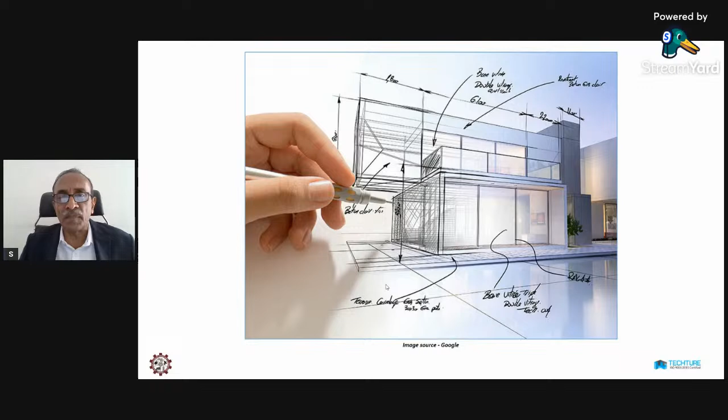So we'll quickly jump to case study one. This is a project we have done in West Africa - West African Soya Industries Limited in Nigeria. The scope of this project was a solvent extraction plant, a plant where you extract oil out of seeds. The seeds could be soybean, rice bran, sunflower, or groundnut. Basically, this is a complete plant where our scope was to analyze and design the complete MS structure, and also do the foundation design.

We were given the general arrangement drawings by the supplier, and the client connected us to the machine suppliers. We were given the load data, and for that we made STAAD models. I'll take you through the complete process where the shop drawings were generated. The best part is that we were able to execute this project sitting in India, Nagpur, several thousand kilometers away. They followed our drawings in toto, and the plant was erected.

The other building that we were assigned was a de-oiled cake building. It's a godown, a warehouse, nothing big in this particular building, because we were supposed to do the foundation design. The vendor was Kirby Systems - Kirby is an international giant in pre-engineered buildings. So we got the drawings and were assigned to check, as a proof check, their drawings for correctness. Mostly they have a very good team themselves, so there are very few errors, so to say.

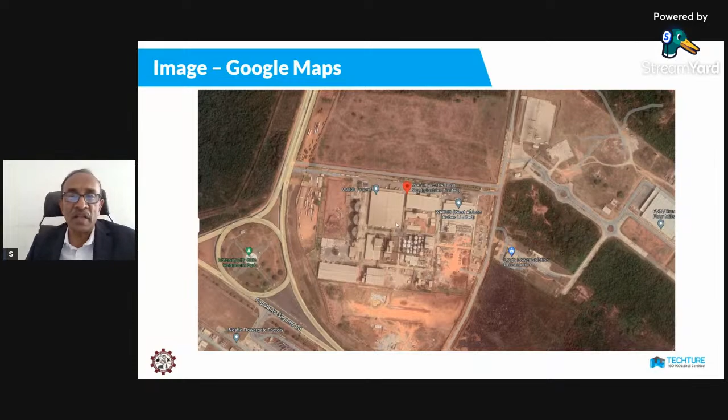So moving on first, this is the image of the location of the plant in Nigeria. It's about 40-45 kilometers from Lagos, which is the commercial capital, so to say, of Nigeria. So this is the Google map.

So it happens in two phases. One is the civil foundation executed on the site, and the structure is fabricated either in the workshop or in India at many locations - sometimes they do it themselves at the site itself. But there are certain challenges in getting it designed and executed on the site, because there are issues of inconsistent current or power supply available, and there are some quality issues also.

So generally, for such important plants, the plant should be fabricated in a workshop, and then it is painted - there's a process called shot blasting and sand blasting. Then there's a process where they put enamel paints or epoxy paints on all the components, and they are so designed that they are just like Lego toys. Most of you are conversant with Lego toys - it's all plug and play. You should have everything nut bolted, and then you send it, and they should perfectly fit each other, and that is how the erection process starts.

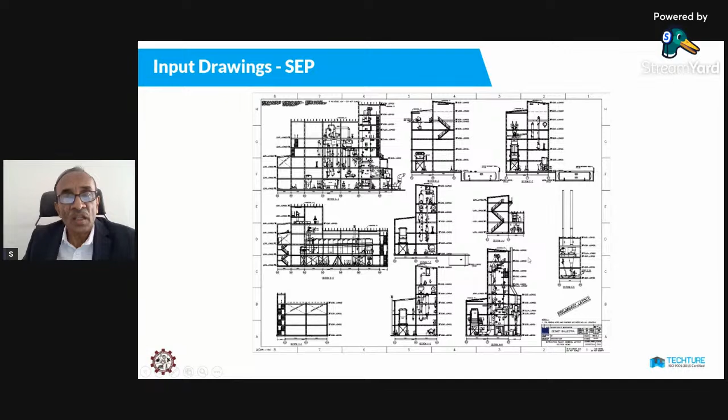So the first step is to prepare a three-dimensional model. Here we had used the loading as per the European code, so we had used the British standards BS 6399, and for the earthquake, we were told we could follow the Indian standard. The grade of concrete used is M30, and the grade of steel is FE 500.

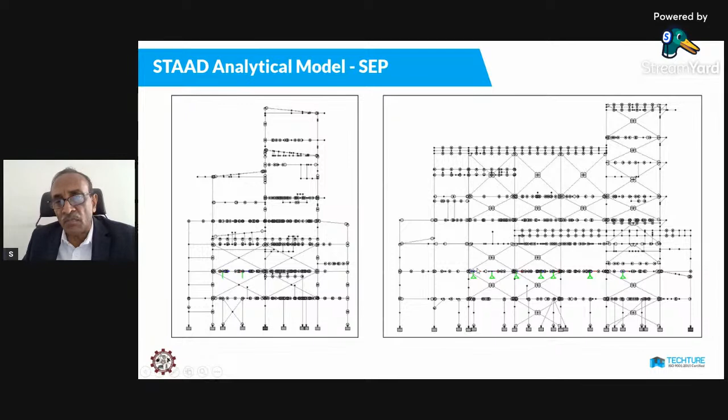So this is the place where this model can be shared with the client. It can be shared with the supplier, who would zoom in and see whether the beam framing suits him or not. There are a number of cutouts required for the process as per the drawing. So whether the input given by the supplier has been translated into your STAAD model or not, this is the place where you can check it first.

There are some monorails to be attached. Here I can show, if you can see my cursor, there's a monorail for lifting equipment. So there's a path of the monorail which is given in the input drawing, and that also you have to model here.

And the first iteration, let me tell you, is you have to guess some of the column members and beam members, and then run the STAAD and achieve a convergence.

Now, any good structural engineer would want to optimize on the structural beams, but at the same time you should remember that there should not be too many sections, because then fabrication becomes very difficult. If you get too many members, then the cutting length or the wastages are quite large, and that defeats the entire purpose of economy. So this is the analytical model where the properties have been assigned.

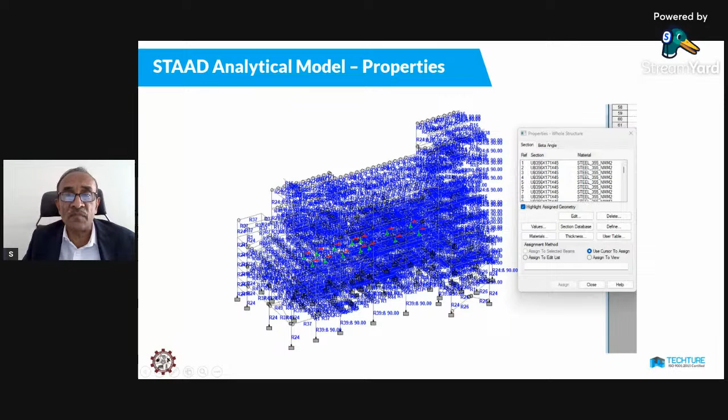Similarly, you have the live load, the earthquake load, the dead load, all the loads and the load combinations, whatever is expected, has been given here. All loads have to be considered.

Now this is the place where once again you can interact with the client, or the machine supplier, and tell them these are the loads that you have been considering, and if they find that some additional load is to be put on the structure, this is the time it can be done. Once you get confirmation from the client and the machine supplier that the model looks good, then you can proceed with this analysis.

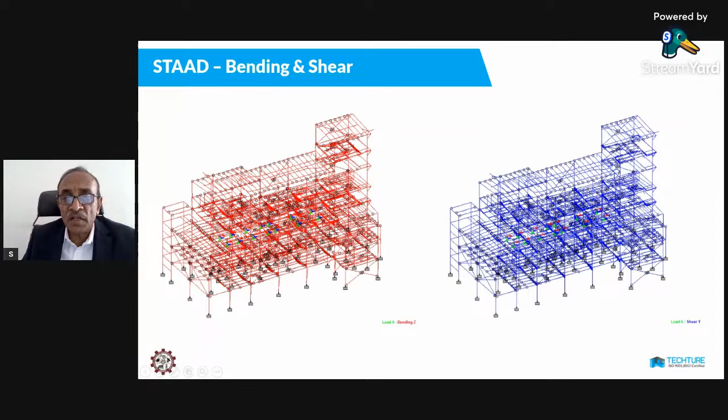Here you are getting the bending moment diagram and the shear force diagram, and one more is the deflection diagram. So deflections are the most governing, because the deflections are the first to occur. If the deflections are under control, then the structure gets an opportunity to stress itself.

If your deflections go out of control, then the stresses do not reach their peak values, neither in bending nor in shear. And usually for steel structures, the structure will have a tendency to distort. See here, you can see some of the nodes flying off, they're going away.

But if this lateral deflection is within limit, then the structure is said to be rigid — it is properly tied up. And from that point, you can get the bending moment and shear forces.

So now each and every member has to be checked for the maximum allowable bending stress and maximum allowable shear stress. That is how a good structural engineer has to tabulate the sections required at different levels, assign them, reanalyze it, and this iterative process has to be done over and over again till he gets a good structure.

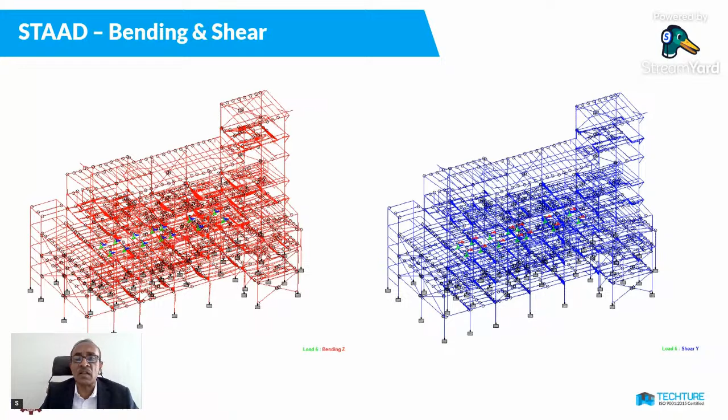Now we come to the foundation design calculations. Once you have analyzed the structure, you will get the reactions at various points at the foundation level. Now you have to club all the columns into different categories, and for a particular category you can choose the maximum axial force, the shear, the biaxial bending, and torsional moment also.

There are 6 degrees of freedom in any rigid structure — I hope everybody knows that. You have 1 axial force, 2 shears, 2 bending moments, and 1 torsional. So in total, you have 6 degrees of freedom. Any rigidly connected frame structure will have 6 degrees of freedom, so you can expect 6 reactions.

Using those 6 reactions, at times the torsional moment does not govern, so we tend to neglect that and ignore it, focusing on the axial force, which is predominant, and the biaxial moments. Shear is usually under control if axial force and bending moment are taken care of.

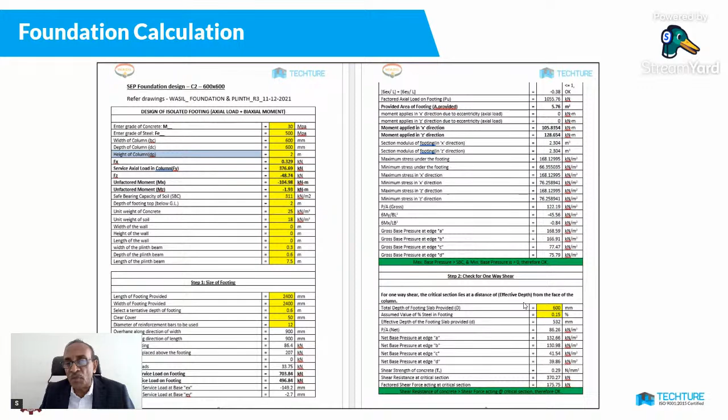Then you have to also check for the one-way shear depending on the cantilever portion that is outstanding beyond the column face. So let me not spend much time on this.

Next we come to the Tekla model. Now what is Tekla? Tekla is a tool which will help a structural engineer model all the sections through software. It's a software where you can design all the connections, and it will generate all the shop drawings. So Tekla is one company supplying software for shop drawings.

The other is Advance Steel, owned by Autodesk. So either you use Tekla or Advance Steel, and you can generate the model.

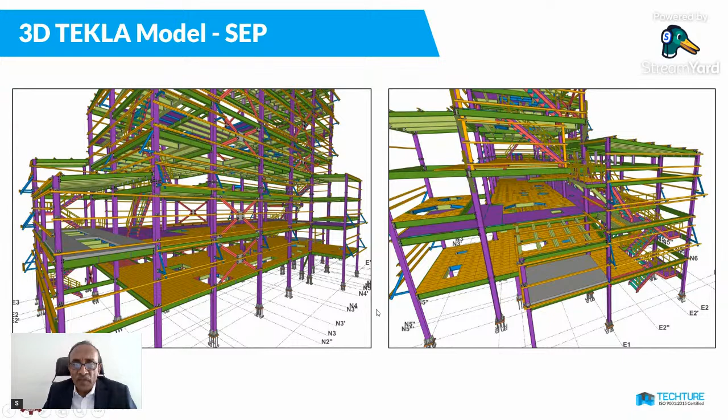The beauty here is this model is directly input from the STAAD output — the output of STAAD comes directly into Tekla. So these are some views of Tekla, where you can see we have modeled the columns, the beams, and the connections.

Now this is a closer view of the connectors. All these bolts, depending on the shear force in the beam, transfer the shear to the column through the bolts — you have 4 bolts on this side, 4 on the other. You have to calculate the thickness of the plate, and the weld of the cleat through which it is transferred.

So all these calculations are to be done by the structural engineer. There are some stiffeners to be provided so that the seat, this is called the seat, should effectively be able to transfer the load from the beam to the column.

The beam itself is designed. The section of the beam is designed for the bending moment in that beam and the shear force coming in that member.

And if you see the arrow here, this is for the one-way slab. Now the slab can be either a precast slab, it could be a metal deck sheet on which concrete is poured, it could be grating, steel grating, it could be checkered plates, and so on and so forth.

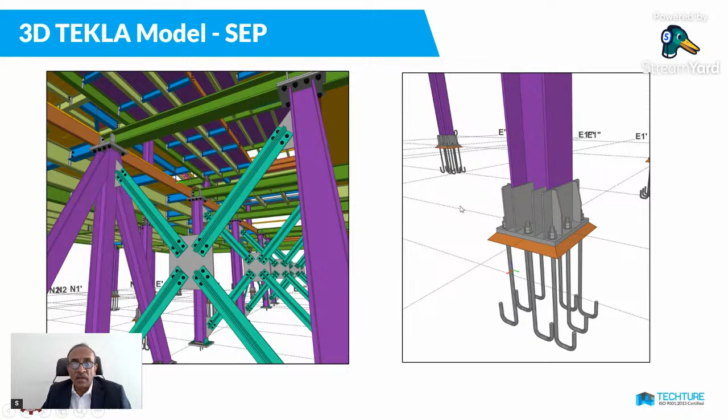Now this is very important because this is the first drawing issued by our office to the client to procure the steel. So what he does is he takes this drawing, does his own study, and then transfers this drawing to the fabricator. The fabricator himself will study all the details, and then he will place the order, and that is the first step to start the fabrication.

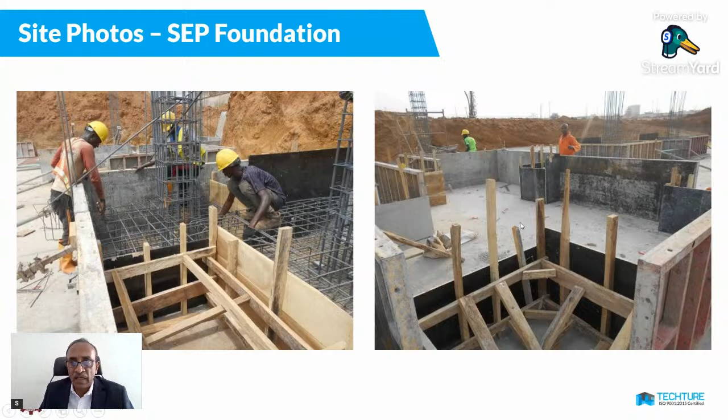Now this type of technology is available using building information modeling, BIM as it is popularly called, where you first develop the model in your office, share it with the client, and then as the process of erection goes on, you can compare the model and see how it complements the planning and the practice.

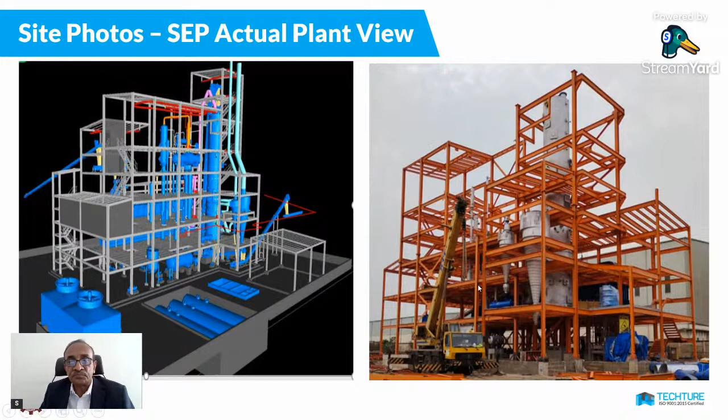So these are some of the images of the equipment at different levels that they are placed. We were given the load data, about 30 metric ton, 50 metric ton to be kept hanging from the floor. So 50 metric ton is a huge load.

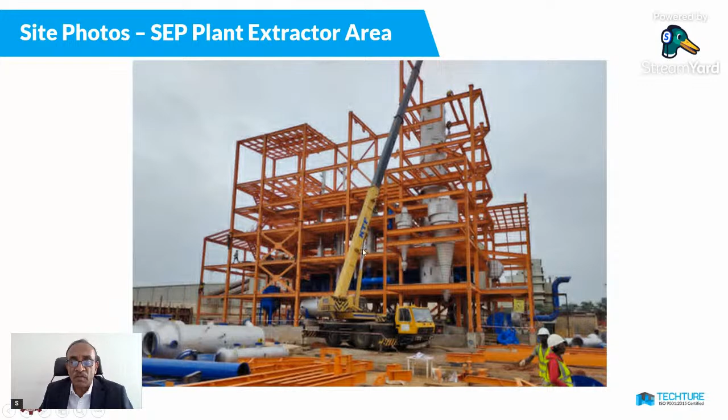So we had to accordingly design the various fixing arrangements, how the load will be first transferred on the cleat, from the cleat onto the members, from the members to the secondary members to the primary members, and from the primary members to the column, and through the column to the foundation. So this is basically the chronology of the load transfer mechanism in any structure.

So these are some of the views. The blue one which you see is the main heart of the plant, that is called the extractor. We were required to give all the detailing of the steps.

Each step has to be accurately designed. It has to be actually detailed out in the Tekla model, and all the connections, because the plant is about 40 to 50 kilometers away from the workshop.

So any change means it's a cost to the client. Suppose I miss out on one member here, or if the length is missed out, then it's a cost to my client, and also a huge time delay, because when the people at the site try to assemble this member, if they find it either too short or too long, then the work will be held up for some time, and the supplier has to be informed. Then he will manufacture that.

He may have some other ongoing projects, so he may ask for 7 days time. Then that particular piece will arrive. It has to be painted, shot blasted first, then painted, and brought here. Then it has to be measured and fitted again. So the complete cycle is about 15 to 20 days. You have to be very particular in this case, for any pre-engineered building for that matter.

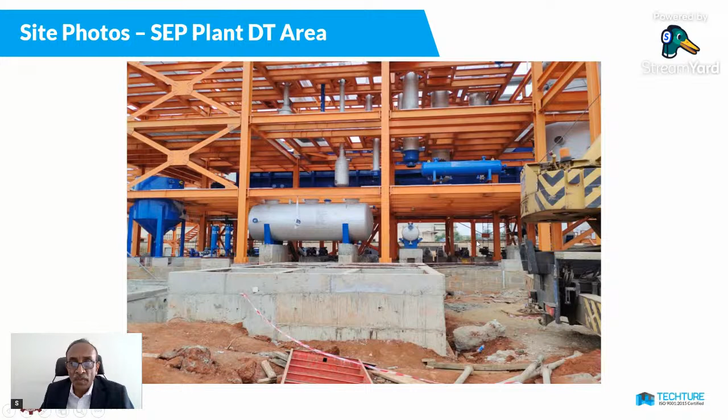So these are some more views, and this is a closer view of the various equipment. These are actual pictures inside the plant. It's quite complex because the bracing systems have to be planned in such a way that you require the rigidity

for the plant. At the same time, you don't obstruct the movement of the personnel, because if the process people who are going to operate the plant find it difficult, then it becomes very difficult.

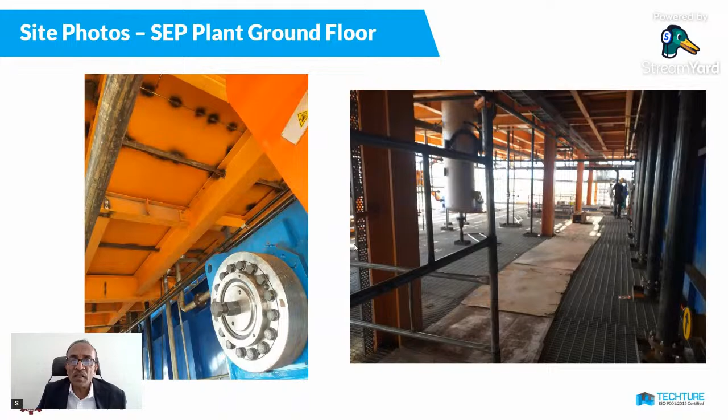So now I'll quickly run through some of the images, some internal views. After about 7 to 8 months after delivering the project, at the last stage in November, I happened to visit the plant. They invited me, and it was a very hectic journey to Africa. But since it was the closure stage and only part of the sheeting was remaining, I was informed that now, in February, the plant has already been commissioned and it's running well.

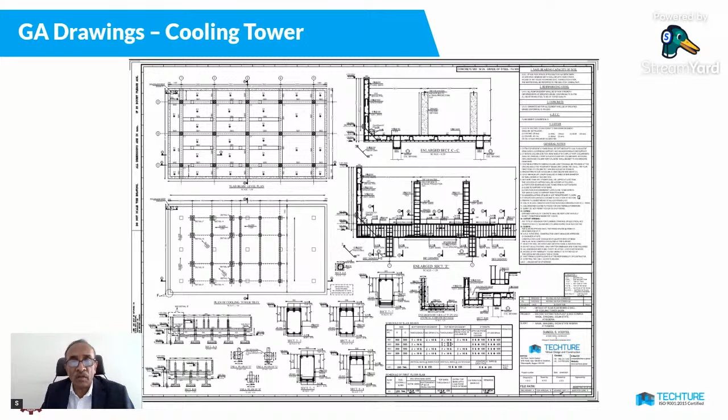So that is mounted. All the details are very important pertaining to levels, because we cannot communicate with the site since the site is quite far away, and we have some timing issues also. They are lagging behind us by 4.5 hours. So for example, now it is 10:30, quarter to 11, so it must be 6 o'clock there. It becomes very difficult for them to catch up with our time, or for us to catch up with theirs. So this is the civil of the cooling tower.

These are some tanks, underground tanks called the hexane tanks. These are the details pertaining to hexane tanks. You have to design the wall here, the reinforcement. I'll not go into much detail, but these are the details of the bar - bar A, bar B, and so on. Then if you want to have a haunch here for better strength at the junction of the wall and the base raft, that detail also has to be given.

Then you have to give the details of the bolts. For a person to get down into the pit, you have to give some rungs like you have in a well, so the person can climb. If you miss this out, you have to resort to Hilti or some other company, which adds to the cost. This is the detail of the solvent water trap, where you have to make different compartments, all RCC, but everything has to be properly detailed. There's a hold fast here, and how to connect one particular edge angle has to be given.

Then all these details have to be worked out. For this, you either need the complete detailing from the supplier, or you have to raise questions. This comes with experience, of course, but you have to be very alert on this point, so that you don't miss out anything and things are executed properly.

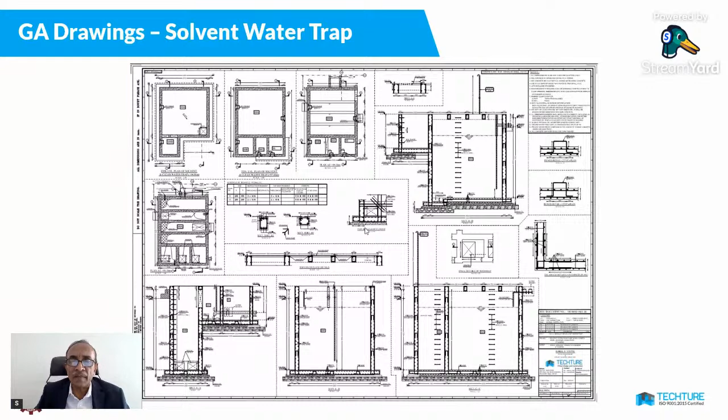So now this is the second general arrangement drawing that we have, the civil drawing which we issued for the de-oiled cake go-down. As I said, Kirby was the supplier here. Kirby gave us the reactions at different levels at the foundation top, and based on that we generated the drawings. This is related to the plinth.

Now here two twin beams had to be given because there was excess fill. The flooring height was about 1.5 meters or even more, because the ground was low lying. So what we do is give a first main beam, then put the masonry brickwork, and then run a smaller beam so as to sustain the pressure. This is a cost saving measure.

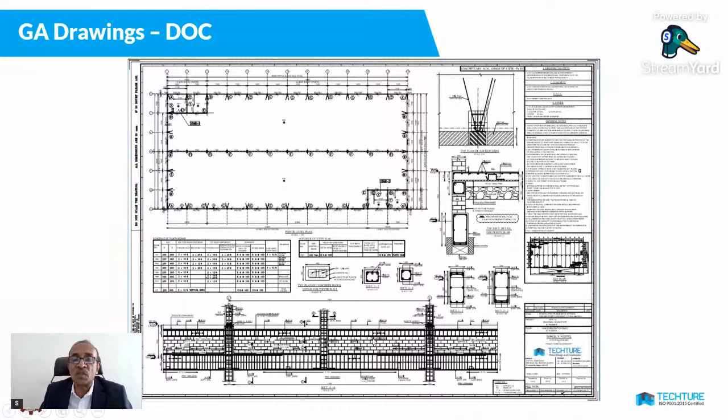Otherwise, you can take a retaining wall from here, which becomes expensive, and also takes a little more time. This is another engineering store building that we had done. All the drawings we have generated ourselves.

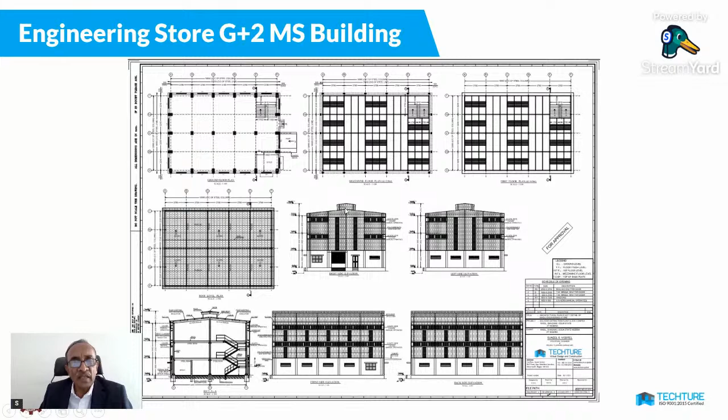This drawing is to be sent to Kirby or other vendors for their quote, so we have to be very clear. This is based on the input we received from the client, that we want the size of the building to be something like 20 by 30, and it will be 2-storied or 3-storied, 3 levels. There will be a staircase on this end, and an office on this floor, and things like that. So these are some images of the building.

So with this, I come to the end of the first case study.

Mr. Azaz, I think we should go ahead with the case studies and then come back to question answers. Is that okay? Hello? Hello? Am I audible? Yeah. Can I move to case study 2, Mr. Azaz? Yes, yes, sir, you can. Yeah.

Okay, so case study 2 is a project in Chandrapur. It's a pharma-based project, multi-organics. This is why I have chosen this, you'll come to know very quickly when you see the plant. This was the input that we got, that they wanted a warehouse of 60 meters by 60 meters, column-free space as much as possible, and this was the input drawing.

They said that we want to have the various things planned. You have some raw material and some space for this and that. So this was the basic input from the client. Then here you can see a sketch where they wanted some monorail on the cantilever overhanging portion, and whether they want to lift and place some of the jumbo bags onto the trucks for loading, and so on and so forth. So this was their first input.

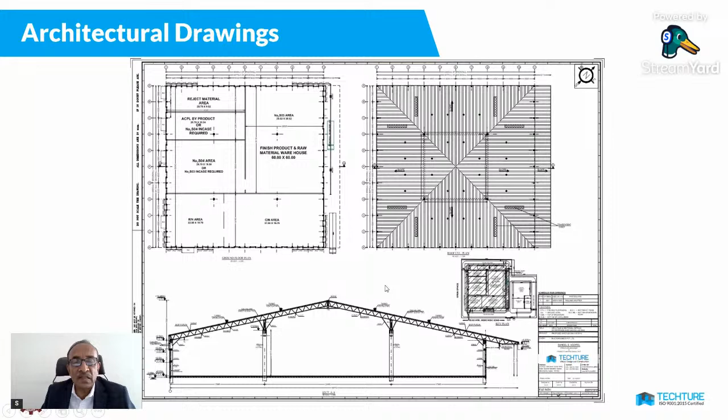So with that, we started, and these are the first architectural drawings which we generated, just to showcase the system that we propose to give. These are the views we generated to show what is in our mind. The hatch shows the brickwork. Above the brickwork there will be sheeting, and then there will be a pyramid.

And then we showed the foundation plan, we detailed out the foundation plan. We showed them that there will be only 5 columns. Then for the proposal, they asked us for the estimate. We prepared the estimate and gave them the costing.

Once they compared that with similar quotes they had got from a pre-engineered building, they were quite happy. They said, okay, it looks like you will be able to match our expectations and our requirement, because there are only few columns. We said, yes, we'll definitely try to match your expectation.

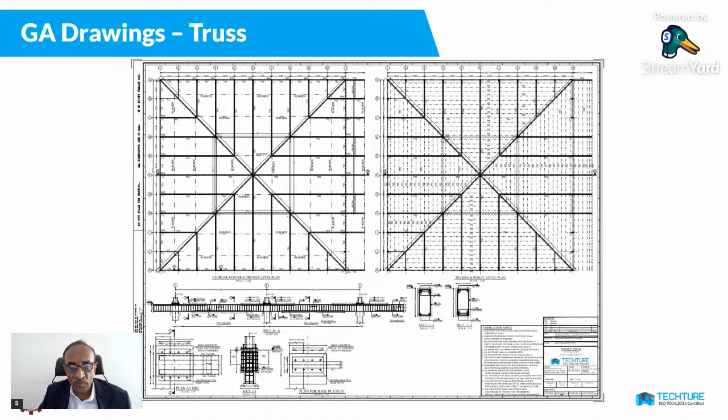So these are the tie beam drawings we had to develop parallelly, along with all the related drawings and the roofing drawings, because the structural drawing also has to be developed so as to work out the costing.

So here we had taken a box girder to receive the trusses, because the spans were very large. I'll tell you that the entire philosophy of this structure is open web structure. An open web structure is where you throw the steel sections away from the center of gravity. You make it as a box, an open box.

What happens in a pre-engineered building, which is most popular these days, is they use plated sections because they have automated machines. In plated sections they need a continuum, a continuity - you need the top flange, the bottom flange, and the web. In our case, we can achieve a good saving by having open sections where the shear requirement is very minimal. That is the benefit of going in for open web sections, open web structures.

So this is our proposal. The purlins are very light purlins. For a 6-meter span purlin, you have 65/6 angle, a rod, and some tie members - that's it. So the weight of this purlin is much lesser than the Z section that pre-engineered building people use. So here you have the turbo arrangement.

If you see on the right, you have a monorail running for this cantilever portion, about 6 meters cantilever. 6 meters is not a less cantilever, it's about 20 feet. This is where the truck can come and the jumbo bag can be lifted up and lowered down once the truck has moved away.

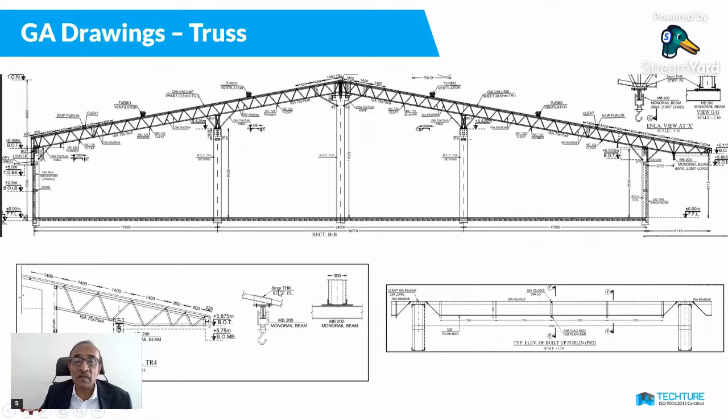Now these are the pictures which we have generated. What I have proposed and adopted is 5 individual freestanding columns. They are at least 20 meters apart. If you see the general alignment, they are 20 to 24 meters apart. So you can have a box girder and you have a framing system here.

Here, because the columns are slender, till such time that your structure is placed on top, there is a tendency of the columns to deflect at the top. But once tied up, it becomes a very rigid frame. So we have the columns 6 meters apart in the periphery along the wall, which is acceptable to the client. But in between, you have only these 5 columns. So these are very light trusses.

Because of the pyramid shape, the advantage is that you have four direction slopes. There are a few challenges in the cutting of the sheeting, because people have a tendency of cutting the sheets randomly, and then they say that if you have a pyramid roofing, there's a lot of sheet wastage. But let me tell you confidently, sheet wastage can be minimized if you do good planning, and the sheet cut from one part can be reused in the other part. So practically there is very little wastage, even if the roofing is of a pyramid type.

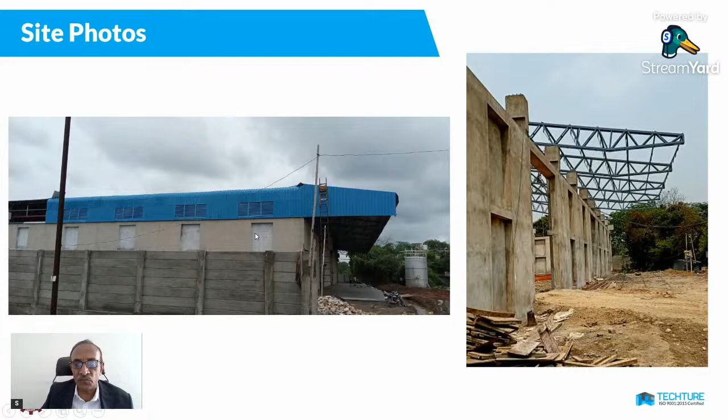Now I have one more case study of a similar type where the shed is 80 meters by 80 meters. I think that is the third or fourth case study, so I will not spend much time on this. This is the cantilever here, and this is after the post sheeting. I don't have the actual latest photo, but it would have been more clear. This is the yard where the fabrication was done. It's simple - this is MIDC Chandrapur on Ghugus Road. In case somebody is interested, we can organize a site visit also with their permission.

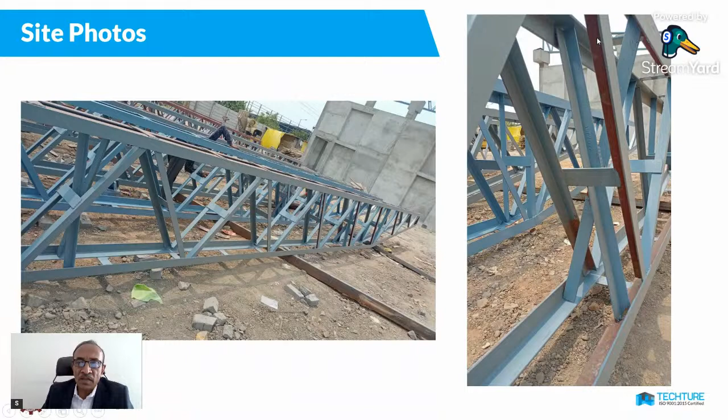So this is during the erection, this is during the fabrication. You have to check the weld length here. Then this part has the red oxide, and the rest of it has been painted. And this is the special louvers that we got made to match the shed look similar to pre-engineered buildings using plated sections.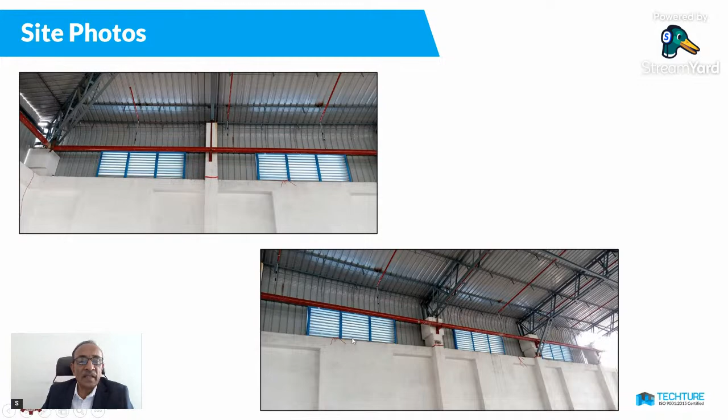And these are some of the images where the erection has progressed even further.

And now it's over a year and a half that the shed is completed, and they are very happy because they have only 5 columns. They can take the hydra and move material from here and there, with absolutely no hindrance.

So now coming to the third case study, and that is the clubhouse. This is a project which is too close to my heart. It was a very challenging project, and I took it as a challenge.

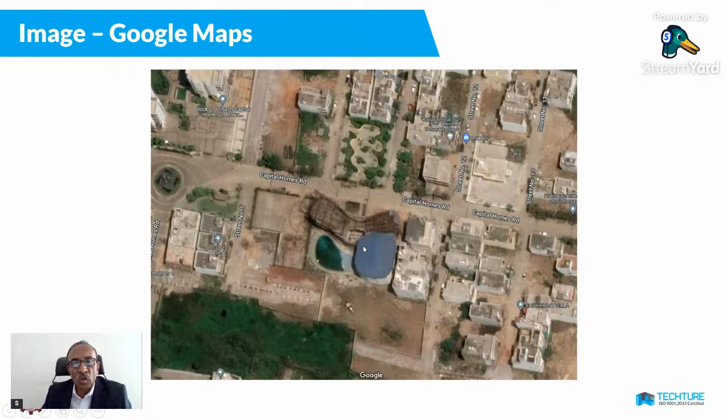So the first image shared with us was something by the architects. I must congratulate the architects, a creative group from Delhi, for planning this excellent structure. They won a number of architectural awards even prior to our starting the work, because of the creativity. Some journals had this printed and published. These views are rendered through Grasshopper, and maybe they started with SketchUp. Mostly architects love to work with SketchUp, and then they migrate to Grasshopper and Rhino and things like that.

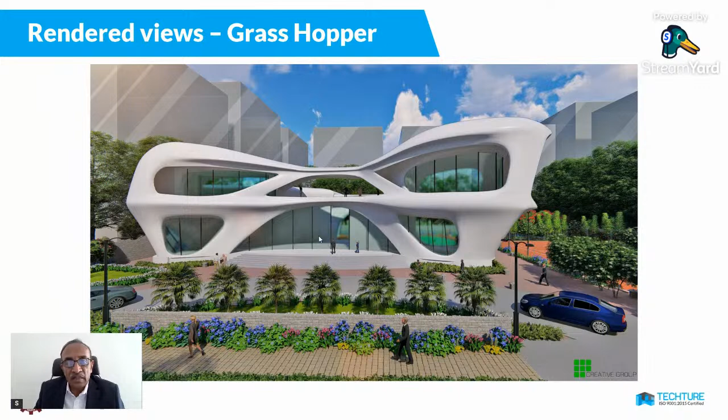So the challenge was that this is the swimming pool, and to the right is the badminton hall. These are the images, and we were told that now you have to develop this structure.

Now friends, let me tell you that whatever we study, beam columns, is the basic of what you have to struggle and achieve in life as a practicing structural engineer. The fundamentals are the backbone on which you have to mount. So when I see people saying, oh, we are doing only beam and columns, no. The beams and columns you have to do for a couple of years, and then you can migrate to structures which will have the same principles. What I'm doing is nothing different from the structural engineering that I learned in college. It's only the application that I have been able to migrate to, or graduate to, I should say, to achieve a structure of this type.

So with these basic images, the challenge was thrown to us.

So what we did is, this is called the wireframe model of the same. Using the Rhino software, we asked them to generate the skeletal model based on which they had done the planning. And then our team sliced off the entire model, because here the first thing that was important was to capture the coordinates. See, unless you have the coordinates, you cannot put it on the two-dimensional drawing, and if you are not able to put the two-dimensional drawing, you are not able to communicate to the site.

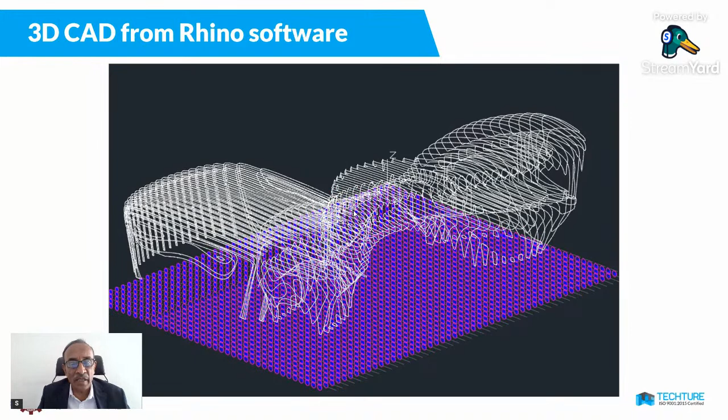And if you're not able to communicate to the site, you won't be able to execute it. They will ask you, what is this point? With reference to some point on the ground, you have to give X, Y, and Z coordinates. So that is precisely what we did. We took out the coordinates using the Rhino software.

We sliced off a number of sections. Here you can see 1, 2, 3, and some 9 sections, a variety of sections in X, Y, and Z. The images here relate to that - here the frame is there and some hood is there, but other things are missing. Here the hood is in two parts. Here the hood is in two parts with a tail. Here there is no hood, only part of the body. So that is how we could understand the complete three-dimensional geometry of the structure.

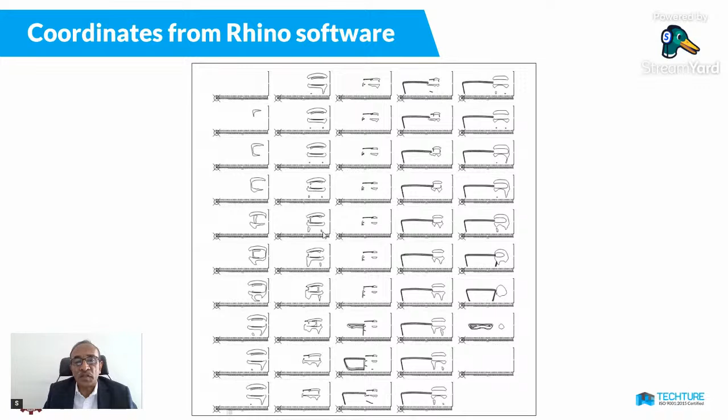So here you had the staircase, you can see the spiral staircase. Once again, I'll repeat - this is the badminton hall, the swimming pool, and the main clubhouse, which is ground plus 1 story. On the ground floor, you have the squash court, and other things here with some pool table or something, and here you have the toilet block and the entrance.

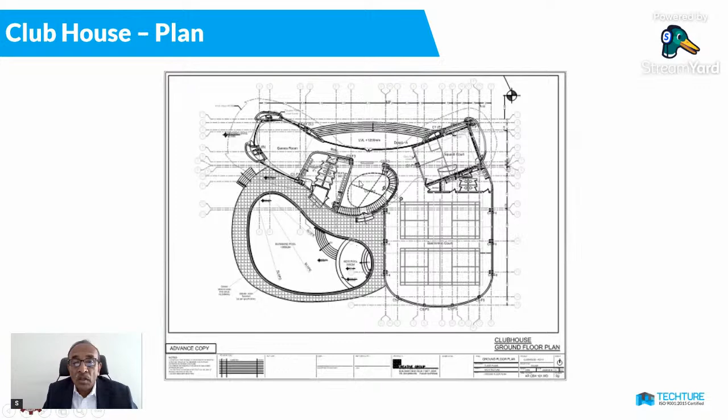Now, these are the drawings which we generated for the RCC drawings, where they wanted folded steps for the staircase. The entire staircase is cantilever. From the images you'll see, this is the schedule and a few sections of the main beams.

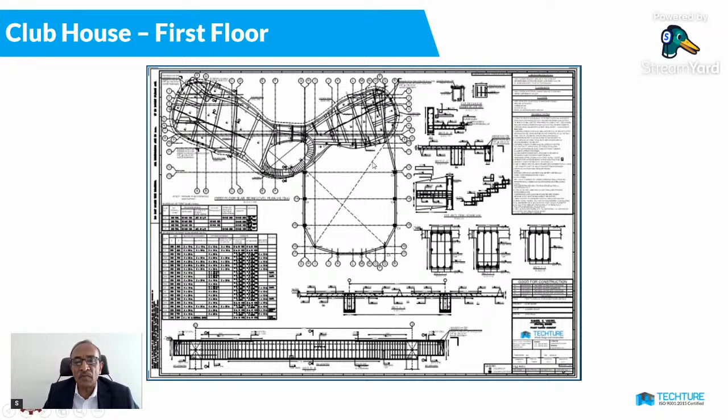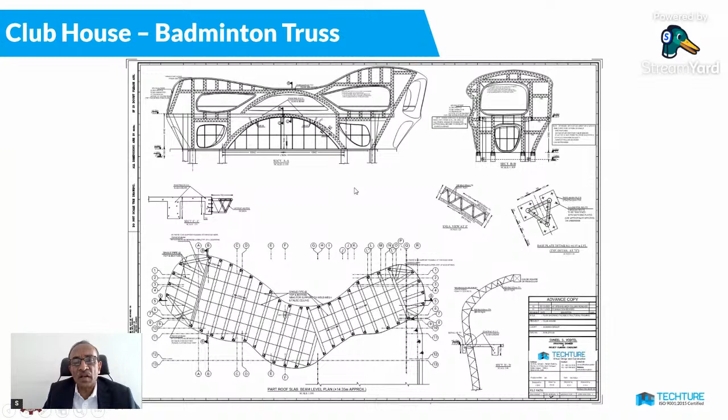So these are some preliminary drawings which we generated, and the RCC photos during completion. This is the truss of the badminton hall structure, the RCC structure.

Now here, this height is 6 meters. For those who want to understand the scaling effect, the height of the complete structure is about 12 meters - as tall as a 4-storied building. But here this is a 2-storied building, 3 plus 3, 6.

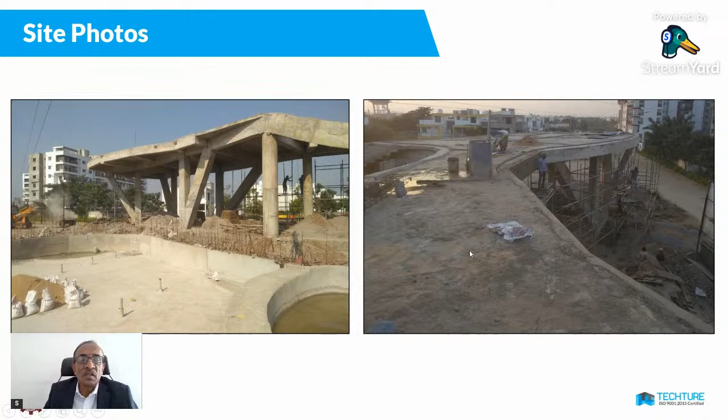And because the columns are getting terminated here, and they wanted the shell to rest here, we were asked to have the columns of this shape. This is the folded staircase, fully cantilevered from the shear wall. So you can see here there is a beam. These steps are cantilevering out from the beam, and there is no wall here.

And these are the completed pictures of the steel structure of the badminton court. Now, this is the point where we started. They had displayed this image at the site.

Just in the township, they wanted to showcase to every occupant or tenement resident what was coming, as they were curious to know. So what they did is, as we started the work, they displayed that as a big billboard on the site. And then people were just - we were more scared, because the people knew what was to happen, and we were very, very ignorant of what we were going to achieve.

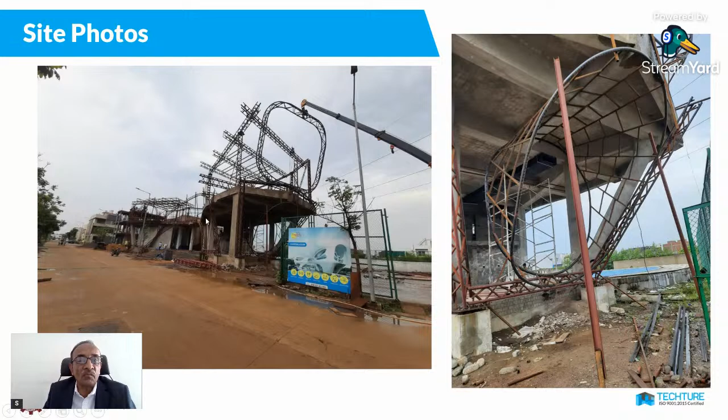And gradually we developed these sections using three pipes and then doing some lattice. Let me explain - had I used heavier sections like I-beams, the weight would have been phenomenal, and the three-dimensional rigidity would not have been achieved for the least mass-to-weight ratio, what you call weight efficiency of the structure. So I wanted a lighter structure with tubular sections of thinner thickness, because not much load is there - it's just the shape that has to be achieved.

Working with angles would have been - although we have used angles for some columns, channels also we have used - but curving the angles and curving the channels becomes a bit challenging. So we have selectively used them as and when required. These are photographs with my team, the fabricator, and the architect's representative from Delhi.

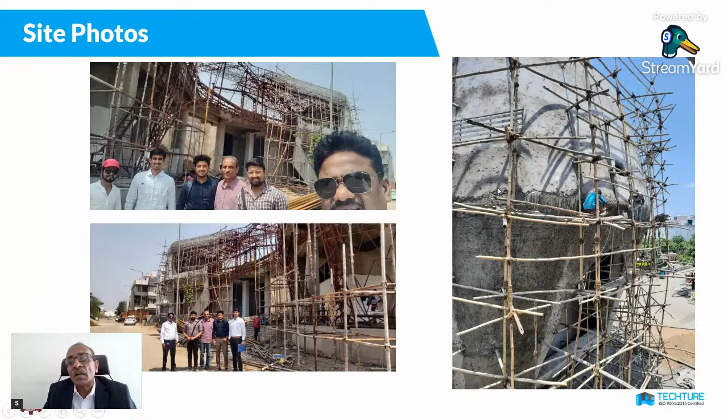And what we did is we applied the ferrocement on top of it. We put the chicken mesh, weld mesh - first the weld mesh, chicken mesh over the steel skeleton, and then applied the concrete, micro concrete you can call, or ferrocement as it is popularly known. So this is the typical section, about 65 NB section. The sample of the weld mesh and chicken mesh put on it, and this is the staircase.

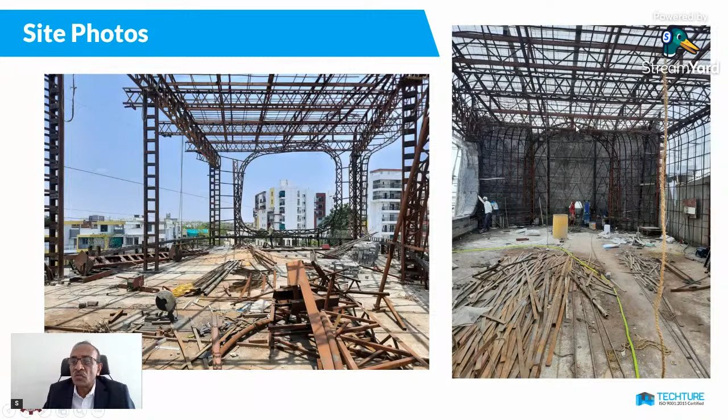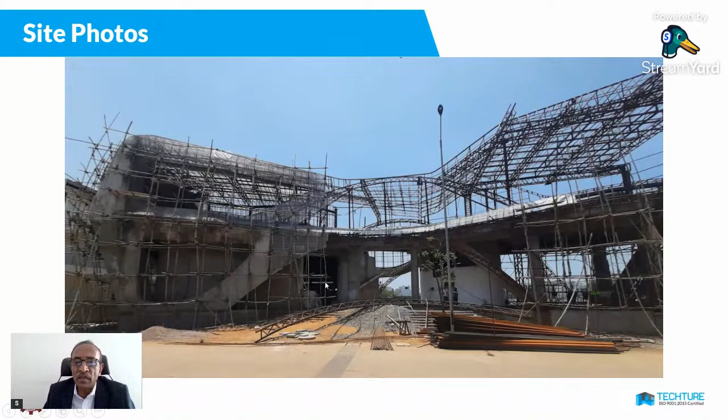So these are different pictures during construction. We had to make an arch here, so we made it again with three pipes. And this is how gradually it was started and developed. Then in this part you put the ferrocement - you can see here the basic skeleton and the ferrocement, ready to receive it.

And this is the internal view on the first floor. The length is more than 55-60 meters. The height is 12 meters here.

Here it is about 8 to 9, about 10 meters here, and 12 and a half meters here. Here it is less, 6 plus maybe 3 and a half.

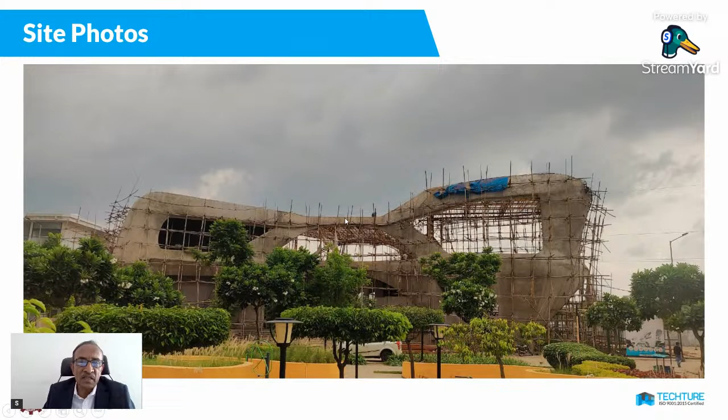And this is how the scaffolding is there, and the project is almost complete now. These are pictures from, I think, November, but now they are ready for even this part, which is almost completed.

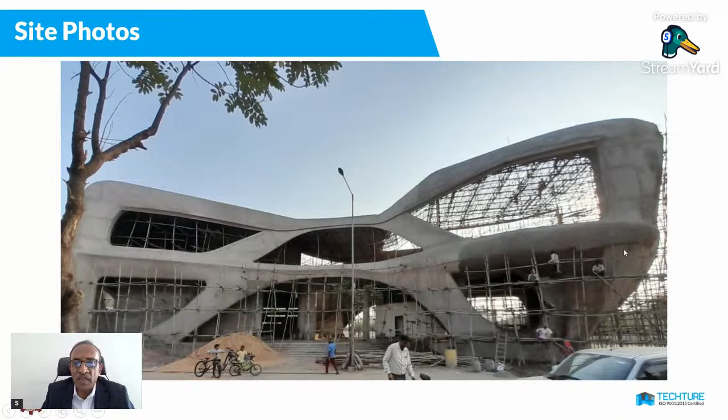And this is the front face. This is perhaps the latest picture, maybe from December, where now they have the glass here basically, and the detailing has already been done. The glass would be arriving and it will be fitted.

So now we come to case study number 4. I don't want to waste much time here.

The client is into ginning - procurement of cotton, processing of cotton, making bales out of it and supplying it to spinning mills. So that was his objective.

So as consultants, they want to have a single window system. They will not go to the architect; they will come to the structural engineer, civil engineer, if he is competent enough to give them a solution. See, aesthetics is what architects are very good at, because that is their core subject. But as civil engineers, we must know the basics of any project. And if we are able to deliver drawings, if we are able to satisfy the client to his requirement, then he will not want another entity, that is the architect, for this, because here looks do not matter.

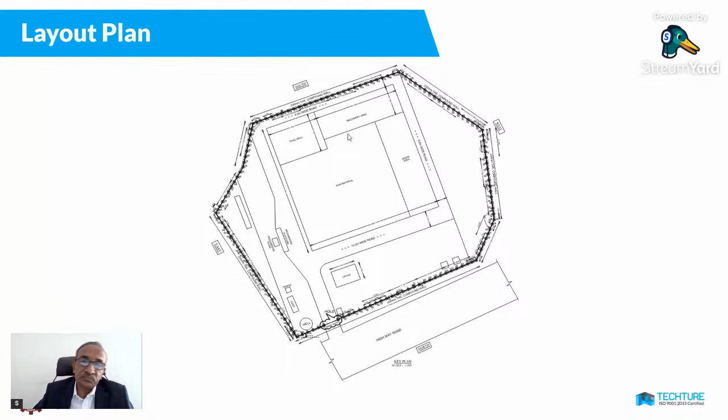So here again, the requirement was about 85 meter by 85 meter, or maybe 80 by 80 - sorry, 80 by 80. So here also we said, okay, we'll give you only minimum number of columns, and they are 9 in number. The smaller columns are just wall-supporting columns, because he wanted partition walls. Let me tell our new participants, friends, that you should note this being about 20-meters long. See, 20, 20, 20, 20 - so 20 into 4, 80.

Whereas the outer columns are at 10 meters grid, and because the wall is to be placed here, you require columns at 5 meters. Otherwise, your wall becomes unsupported - the brick masonry becomes unsupported under lateral load, even the slightest load. It could be because of stacking of material, or because of the wind pressure variance between the two parts of the shed, that the wall is likely to collapse. Or maybe in a seismic case like yesterday's Turkey quake, if the wall does not have intermittent columns, a framework, then the wall is likely to collapse. So you have to be very careful.

So these are some of the details of the foundation. Practically, this is the practical sheet which we have issued, and the construction has been done - nothing has been added or deleted out of it. These are the fine details which one has to work out. You will not get these details in any of the books, because you have to think yourself about the various connections where the trusses are going to come and rest, then develop, satisfy yourself, and then release to the site.

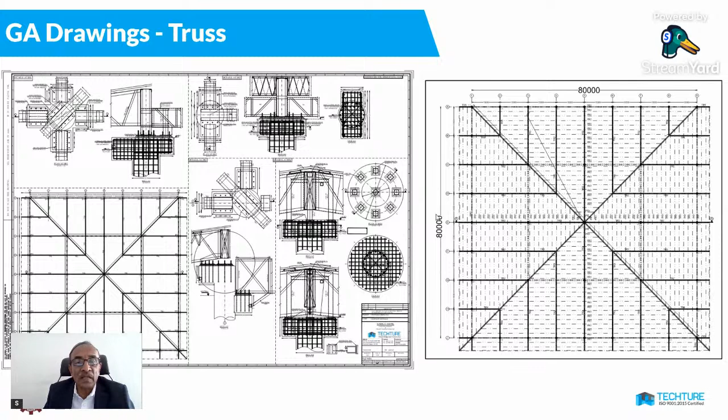The moment you use jack beams, the tonnage goes up for the pre-engineered building people, and they will automatically transfer that cost to the owner or the buyer. That is where the catch is. So here we gave them an option, and said that our civil plus structural cost would be less than what the pre-engineered building supplier offers. At the same time, you will get a lot of freedom inside the warehouse.

So these are the enlarged details of how the structure has been placed on top of the columns. These are the total global view. For the client, first the fabricator or the client has to understand what structural arrangement is being used.

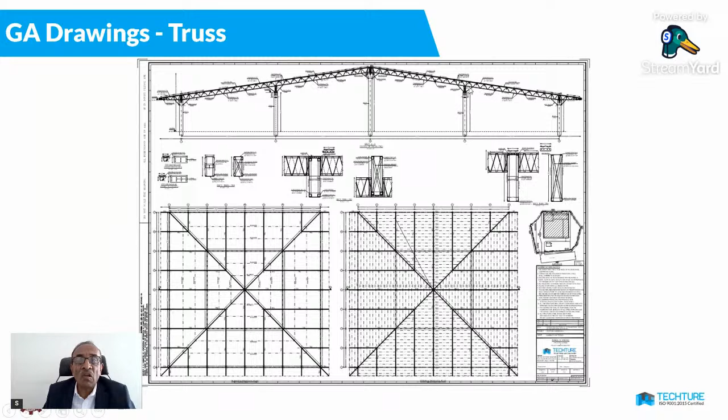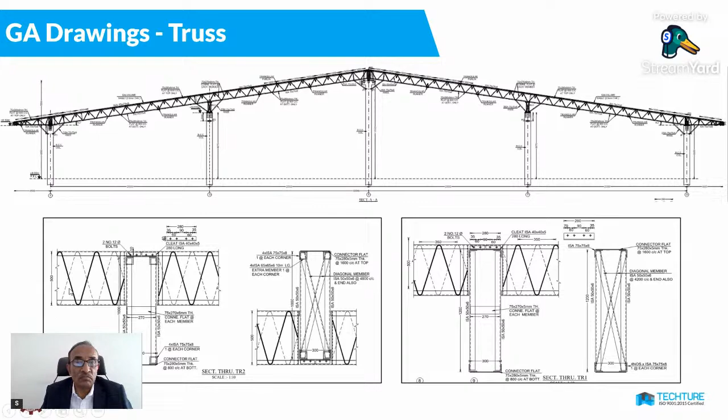These are the knees for lateral stability, because these spans are very large. You need these ties or the knees. The purlins are triangular purlins in our case. If you visit any railway station, the most optimum purlins are deployed by the railways - that was done about 50 or 60 years back by the British. They found that open web sections are the most economical, and that is why you have hundreds and thousands of railway stations across India, but none of them have any other purlin type than the triangular purlins. So these are some of the further details.

And this is the first picture. You can see the cotton being stacked here. The beauty here is that because you have very few columns, just 9 columns, you can take the truck inside to do the unloading. During rains, you can do the loading. You can have the forklift moving back and forth, and this is the arrangement.

But there are certain challenges here. This secondary truss has been received on the primary truss, and there are a number of primary trusses reaching at the same point, so the detailing becomes very critical and has to be planned very meticulously.

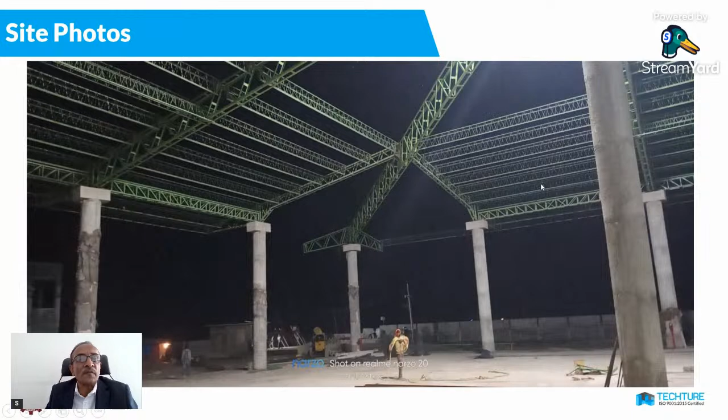This is the night view during erection. One more advantage of having an open web structure with the triangular purlin and box type trusses is you can avoid the bracings altogether. The structure does not require any bracings for lateral stability because you are tying up in a three-dimensional skeletal way - the complete trusses are tied up. You have the runners at the bottom, a few of them, and the purlins at every 1.5 meter centers. So it becomes a very rigid structure, and you can have very large spans here.

And these are some of the views of how the column - we have made a cap here because you have the lateral ties also to be received on the same cap as the main trusses.

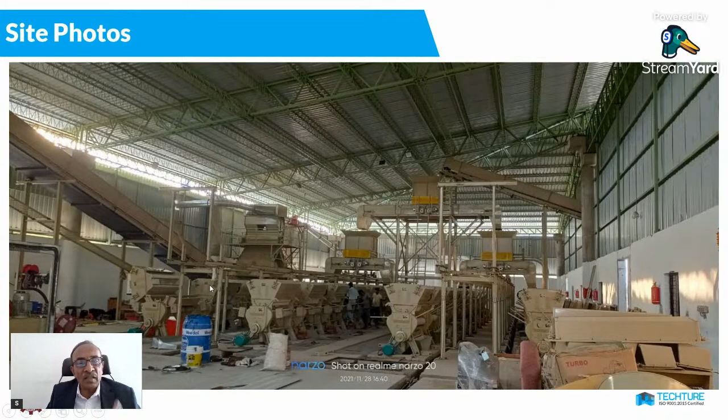And these are the machines placed for the ginning, where you have the raw cotton coming in, it is cleaned, then you have the cleaning process, and then they take it out, remove all the lints, etc. And then it is packed and made into a bale and sent to the spinning mill.

So this is the conveyor here on the left and different machinery in here. But you get very good headroom, and the columns, let me tell you, do not have any plinth beam nor any tie beams. No RCC work except the columns.

The columns have a good footing size, and there is no plinth beam because you cannot provide a plinth beam of 20 meters. If you want to provide a plinth beam of 20 meters, then you'll need some secondary beams, secondary columns of a very small size, 4 feet by 4 feet, with a stub. We call it C0 columns at every 6 meters. But that is again time consuming and a cost ineffective method of designing a structure.

Because site is in too much of a hurry. Once they open up the site to start the work, they want to complete it as quickly as possible.

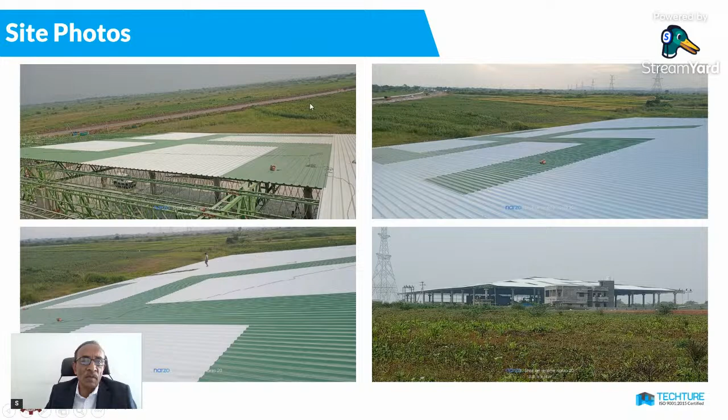So this is the swastika at the top, which is seen from the highway. This is going to Ramagundam, from Mancherial to Ramagundam highway. And this is the long shot. These are some more views during erection and during completion. This is the fabrication going on.

And with this, I come to the last case study. I think we have about 15 minutes, and I can complete in 10 minutes, and we'll have 5 to 10 minutes of question answer session.

This case number 5 study is Mani Ratna celebrations. This is a hall in Amravati, about 150 kilometers. This is Nagpur Amravati road. You have a lot of new projects which have come up, City Land and Busy Land, those who are conversant with this part of Maharashtra, Vidarbha — this is a fertilizer plant.

Earlier it was a fertilizer plant. In fact, coincidentally, I had designed the roofing and the complete structure of this 1 lakh square feet about 22 years back. It was in 1999-2000 that I had designed the warehouse for fertilizer. They have a big fertilizer plant. Now they wanted to convert this into a celebration hall, because with the passage of these 2 decades,

the city limits got extended. So what was considered as an outskirts of Amravati came within the inland. It became a prime area which is surrounded by all the business community. There are a lot of retail and wholesale cloth markets that have come up here.

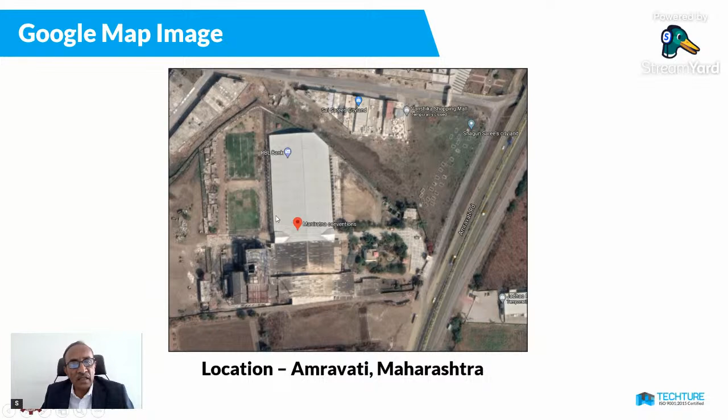So it was the fertilizer plant earlier, 30 meters by 100 meters with a central row of columns for storing fertilizers. It was constructed about 21 years ago. And there are lean-to sheds, 15 meters each side, again designed by me then. And open footings at 7 feet level, because it's all black cotton soil.

It's all black cotton soil. And the RCC columns, which were 230 by 450, were only 6 meters high, because the span was only 15 meters. So these column sizes were 230 by 450, about 9 inches by 18 inches. And the trusses were in MS angles.

Now, the city limits got extended. The client wanted to convert the go down into a celebration hall for large marriages and large gathering functions. So what struck him was he wanted to remove the central row of columns completely. This was the hurdle — that the go down of 30 by 100 had a central row of columns which had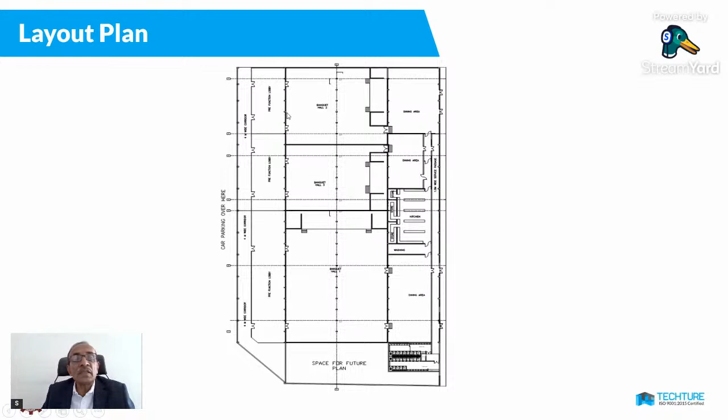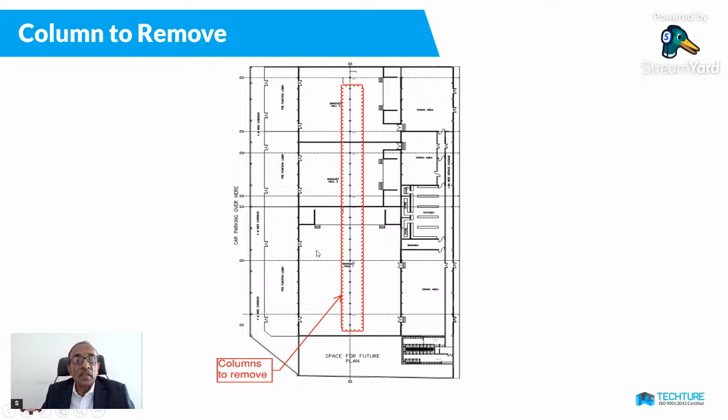But the biggest hurdle was getting the columns removed, because without a column-free area, this would have been a failure. So since I had designed it, they approached me, but they approached me last.

Very interestingly, they approached all the structural people outside Nagpur. The owners told me themselves that they went to Delhi, Chandigarh, Pune, and consulted a number of structural engineers. Everybody refused, saying this is not possible because it's very difficult.

Your footings are very less, your footings are very small, and it's not possible to strengthen the foundations. So they came to me and offered that if I could do it. I said, yes, we can do it.

They said, what will be the timelines and what will be the modus operandi of achieving this? So I said, okay, our footings are small, I agree, because that's a compliment for me since I had designed this very economically 21 years back. But now I can strengthen it.

I said we can put some two piles, jacket the columns, put a cap, and achieve it. He asked, what about the truss? I said the top two members you see here are the initial trusses, and you had the column. We will put some additional members and strengthen the truss to span 30 meters.

A truss which was spanning 15 meters can be very easily converted to span 30 meters by strengthening. So for this, we did a STAAD analysis, a 2-dimensional one only.

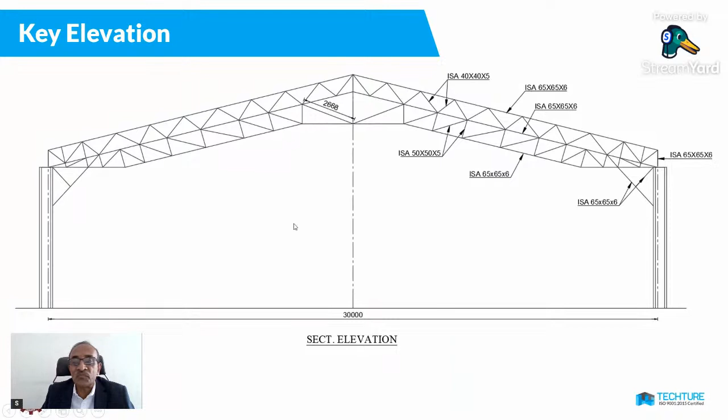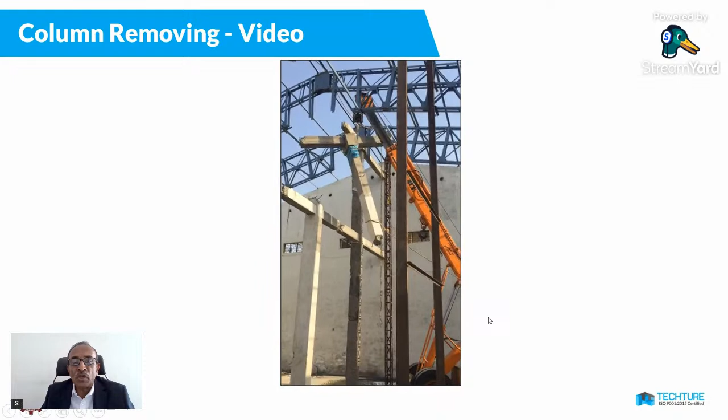The columns were removed. I hope you're able to see the video also. The central row of columns were cut after being supported.

This is the detail of the strengthening. What we did is, this was the existing footing and column. We cut part of the footing here, then engaged a piling contractor and got the piles done, about 375 dia, 2 number piles.

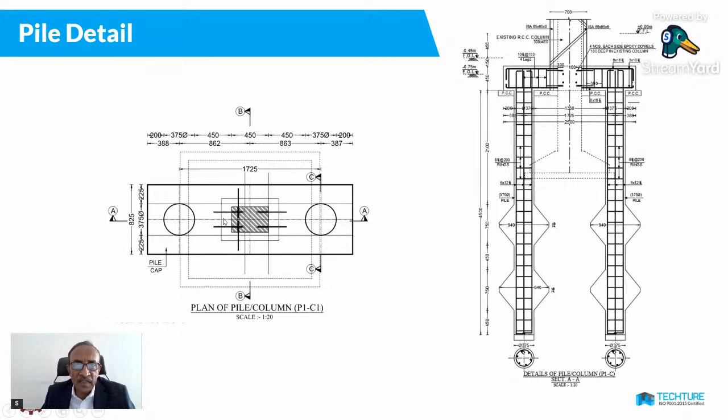We put a cap at the top. The cap was very well connected, and the column size was also increased by jacketing, by rebarring, and converting into other details. Over and above, we put some angles here, increased the size, and filled up micro-concrete in between to achieve a massive size. The size was not that important, but we wanted to be very sure.

And some bolting was done here using sleeves and all those things. This is a very standard detail, and maybe some people are doing it better than me.

This is how the top one is the existing structure, and the lower members are the strengthened ones. We strengthened this using some connector flats, and there were intermittent flats also which were done, and then the existing column was demolished. So this is how the strengthening was done.

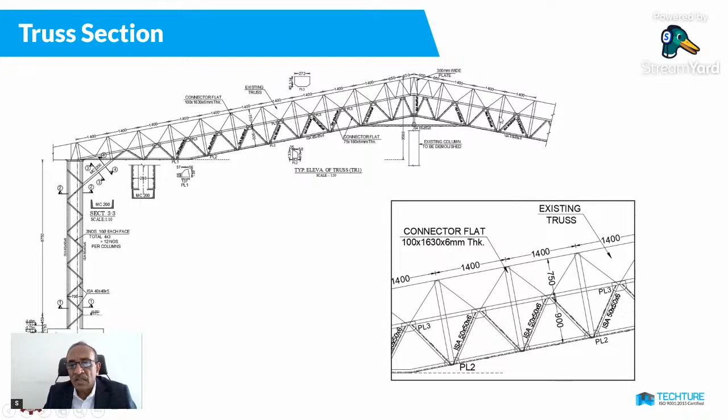Some more details, some enlarged details. We had to use some gusset plates here because to get adequate weld length, it's very important to have connector plates called gusset plates, and some connector flats, etc. These are the standard drawings which we issued.

As a challenge, I told them that whatever is the span, I will make you stand on top along with loading 2.5 times the anticipated load. So he said, you suggest me a scheme. I said you can take slings, ropes, put them at regular intervals on the truss, load it, and we'll stand together on this and prove that the structure can take 2.5 times the load.

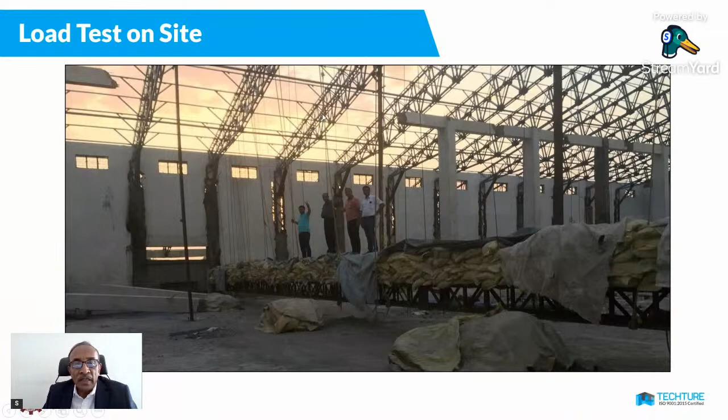And that is precisely what we did. This is the image of the structure. Here the columns have been cut and the structure has been strengthened.

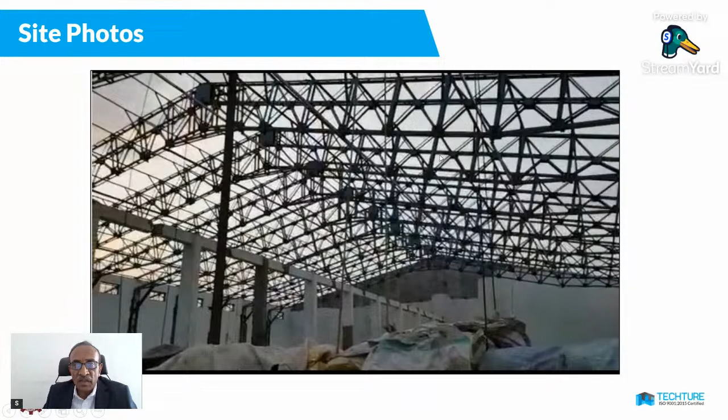And he's the owner, and his son, with me and my colleague, we are demonstrating that yes, when you have a factor of safety of 2.5, now what are the weights that are going to come, which we had asked them. He said mostly plaster of Paris, POP ceiling, false ceiling, some ducting. So those weights he gave us. We applied a factor of safety, and accordingly he had some fertilizer bags lying in his warehouse, so we said why not weigh a couple of bags and stack them together. And these are the detailing.

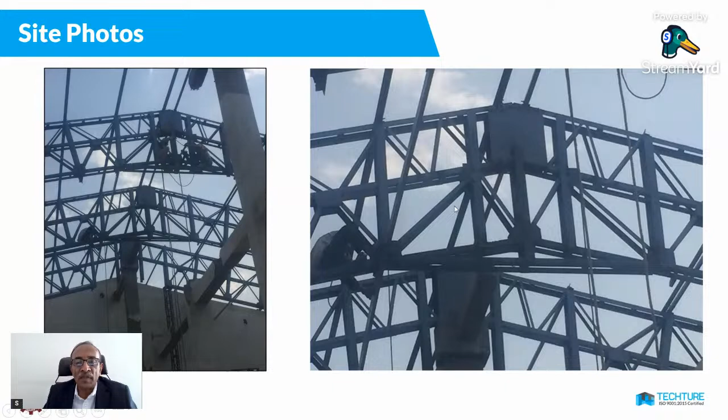This plate is very important because that is the place where the deformation is likely to happen. And even the purlin, we strengthened it and made 5 people stand on top just to demonstrate that it is a very strong structure. And the column has been jacketed with angles, and we had filled up concrete up to this level.

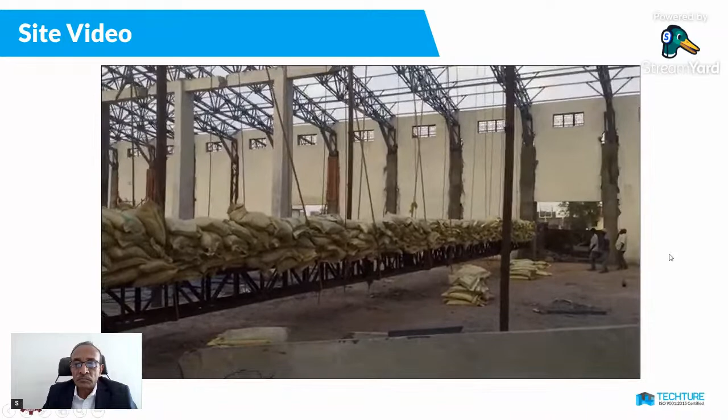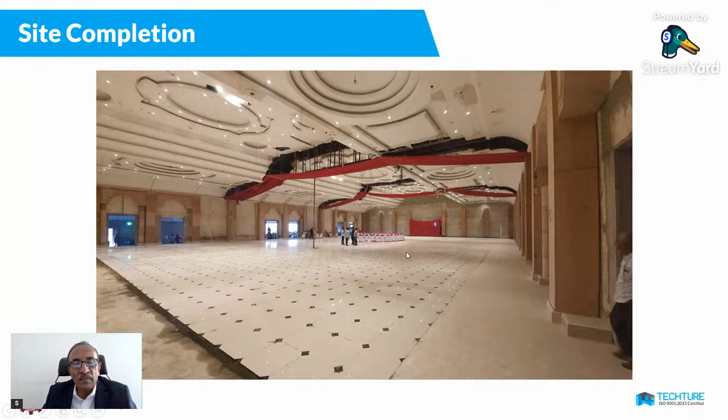And these are the finished pictures of what we have achieved post strengthening. They have done all the POP, and this is the column-free warehouse. And this is again some during the interiors. The final one is still better, much better.

So we could achieve this 30-meter span, and these are the plaster of Paris loadings that were there, and this is the pre-function area, and this is the finished one. 30 meters by the first part is 60 meters or so, 30 by 60, then you have 30 by 20 and 30 by 20, something like that. So with this we come to the end.

I thank everybody for giving a patient hearing to my experiences and a few case studies which I have presented today. Mr. Azaz, I am open for questions.